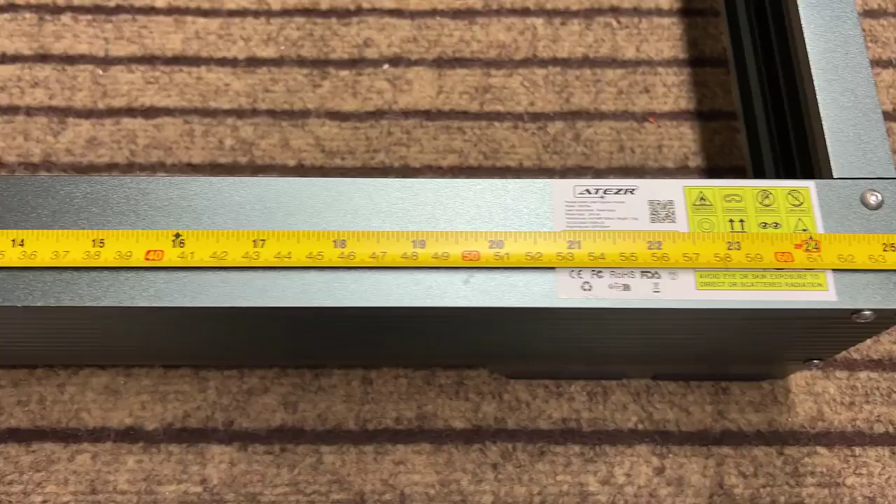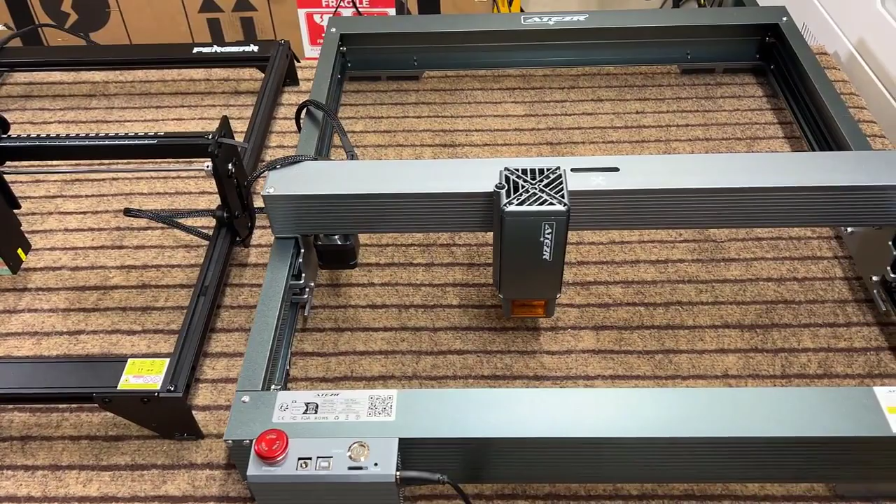Let's take a look at the features of this machine. One thing I noticed is that this machine is larger than other standard laser engravers, as its working area is 430 by 430 millimeters compared to the standard 400 by 400 millimeters. The frame is also more rigid than the standard open frame engraver with 20 by 20 extrusions, so this machine is similar to the Xtool D1 Pro in that sense. But instead of using steel wheels like the Xtool, its motion system uses rubber wheels that are commonly seen on budget 3D printers and engravers.

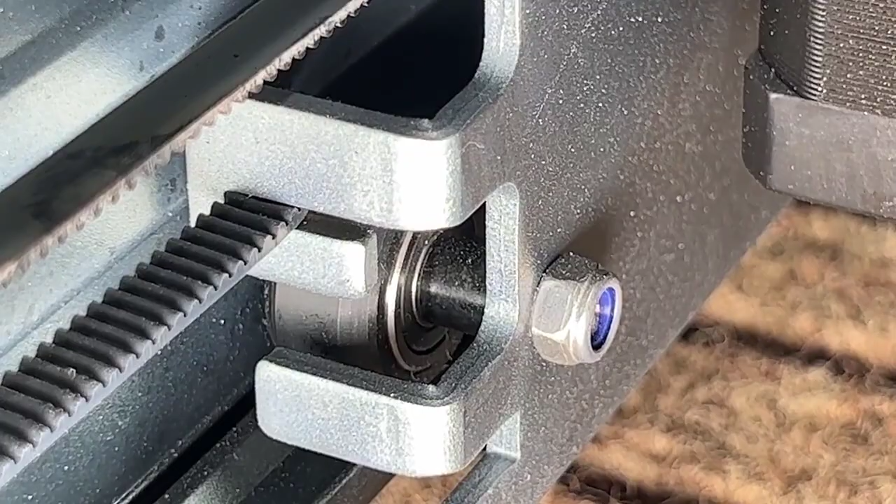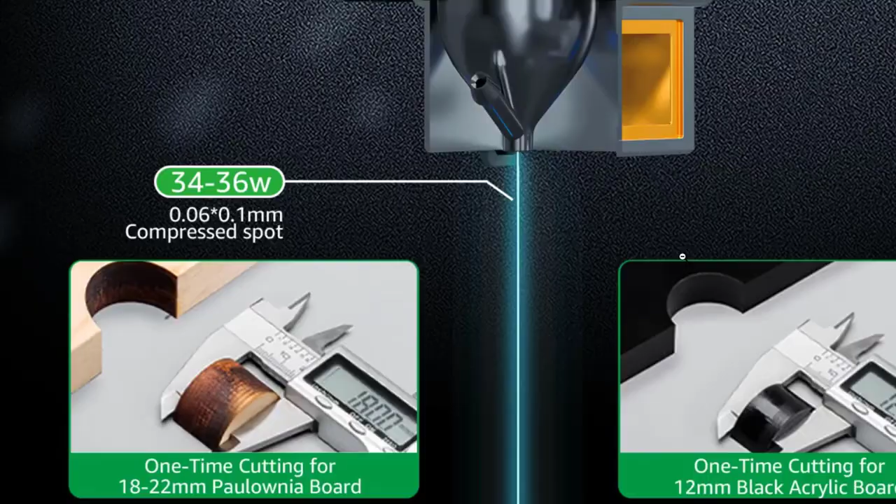The 35-watt module is composed of 6 6-watt modules, so it can achieve a total power of somewhere around 35 watts. With a higher power, I'd expect this machine could cut thicker materials and run at a higher speed. It claims it can cut 18mm solid wood in a single pass, and the top speed is 24,800 mm per minute, which is pretty fast.

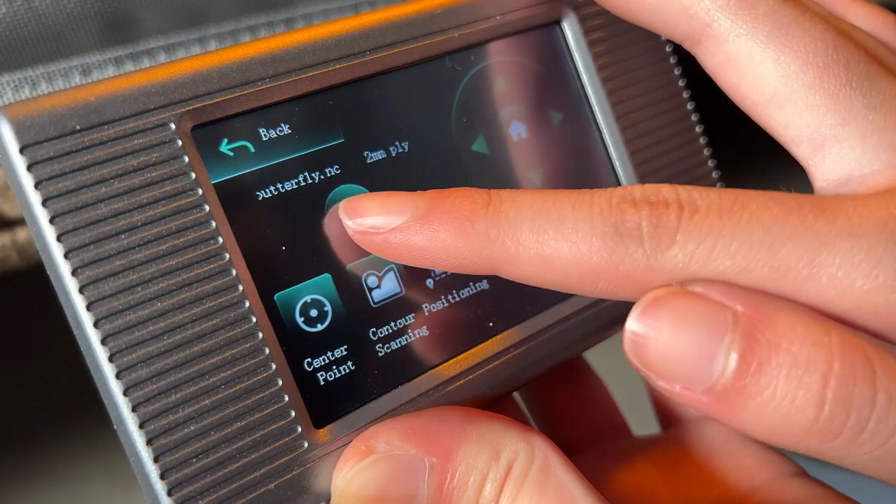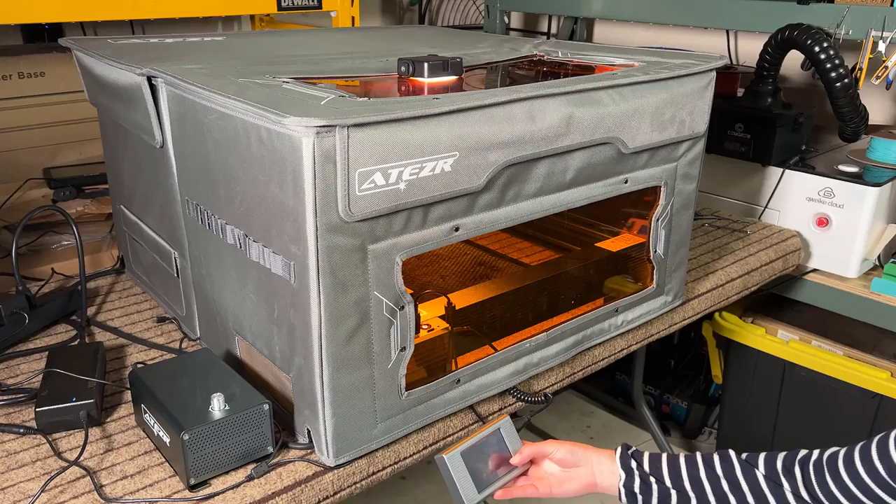The machine comes with a 3.5-inch touchscreen that lets you start jobs stored in the microSD card, and also has some basic controls like jogging the machine. It uses an HDMI cable to connect to the motherboard, which lets you move the screen outside the enclosure if you plan on using one.

It has a Wi-Fi antenna to connect to their mobile app, but it doesn't come with any kind of computer software, so you have to use the free LaserGRBL or pay $60 for Lightburn.

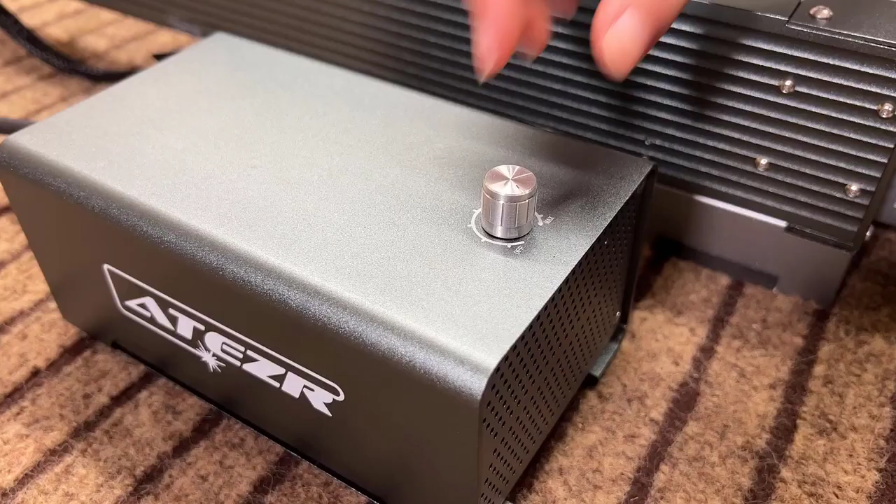The machine does come with an air assist pump with a knob to adjust the airflow, and it's powered by the same power supply as the machine itself using a splitter cable.

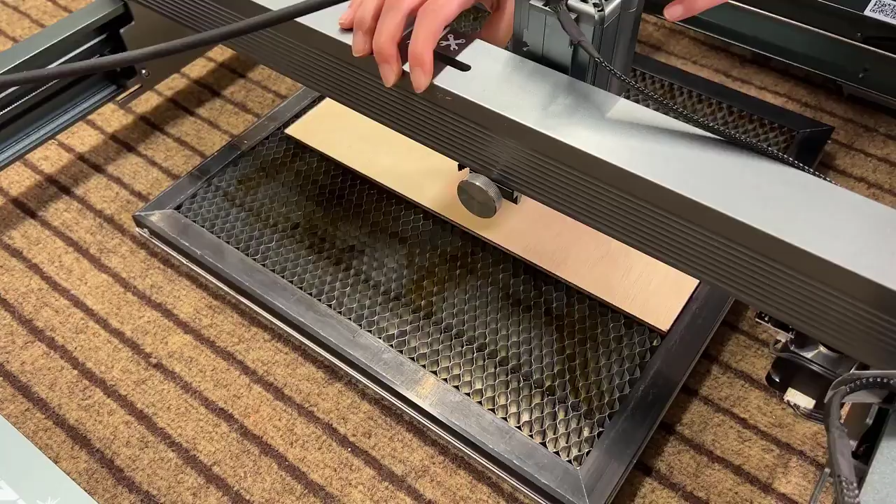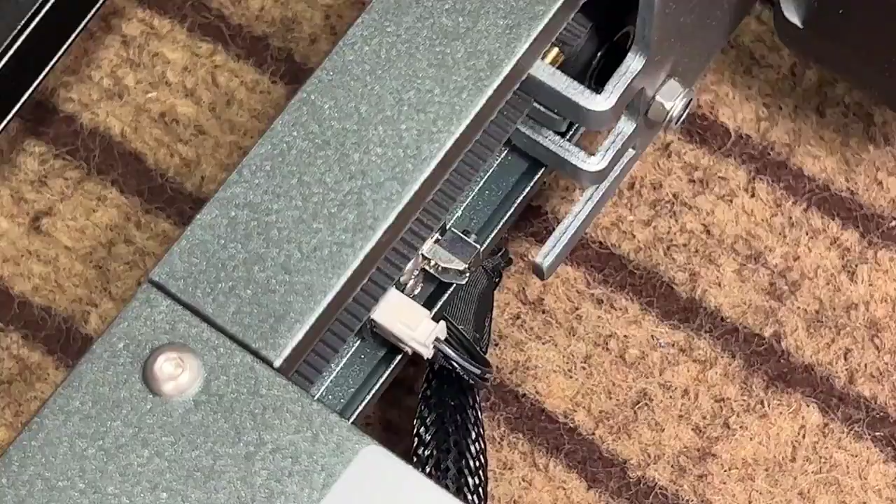The laser module uses a thumb screw at the back to adjust the Z height, and it has a lever to drop it down for you to measure the focal length on different materials. There are mechanical limit switches on both the X and Y axis, an emergency stop button, and a protective cover on the laser module. Overall, the specs and appearance of this machine are pretty nice.

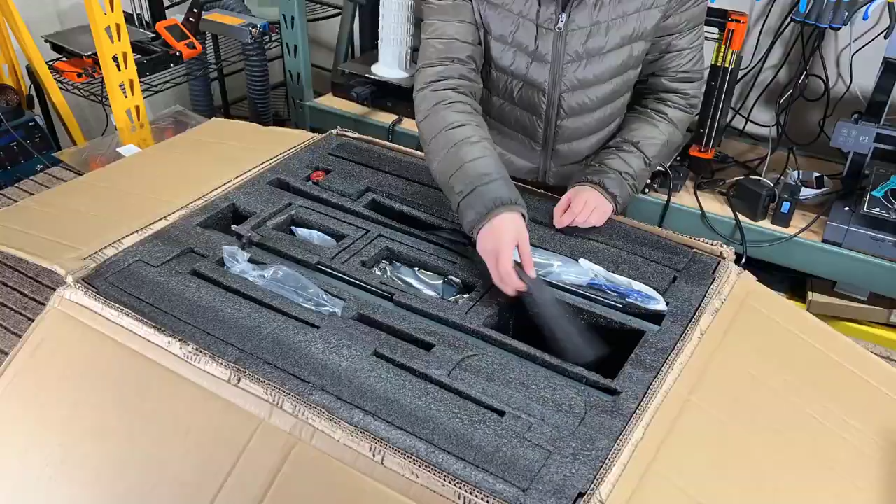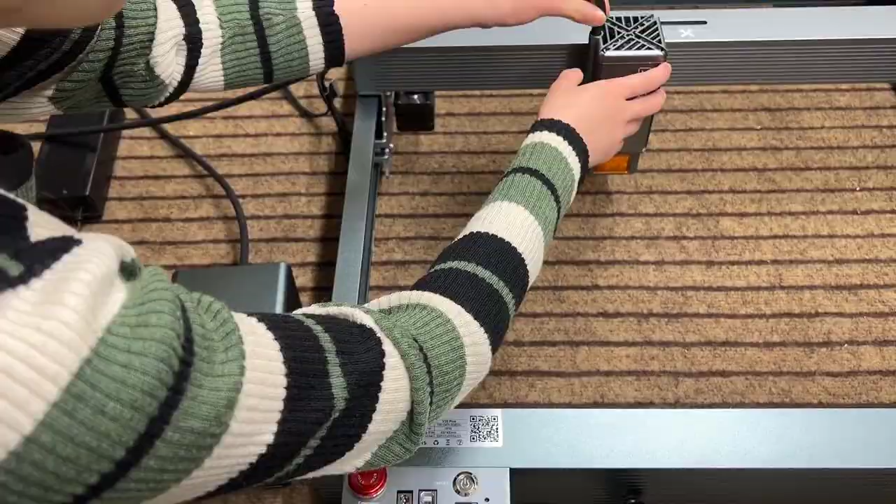Putting this machine together is super easy. You just need to put the 4 sides of the frame in the correct position, put the X-axis on top of the 2 Y-axes, connect the laser module, the touchscreen, the air assist pump, and tighten all of the screws. Other than the machine and air assist pump, we also have some tools, a user manual, and one power supply, which has a splitter cable to power the machine and the air pump at the same time.

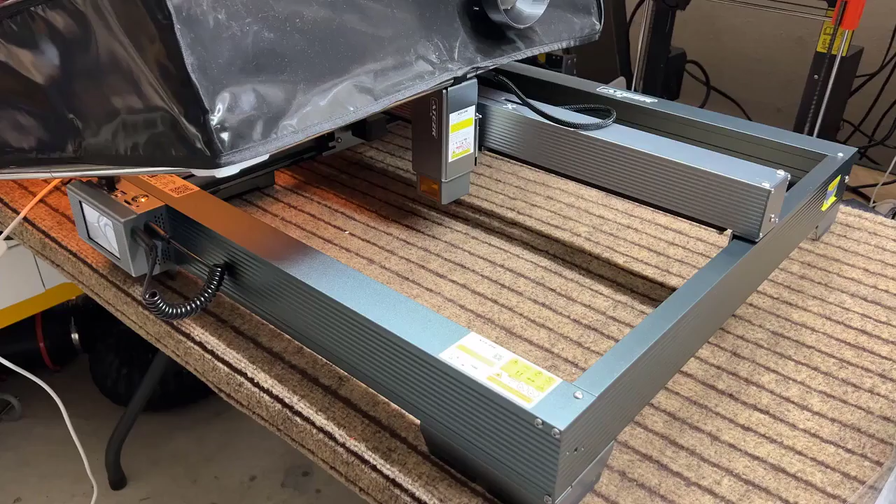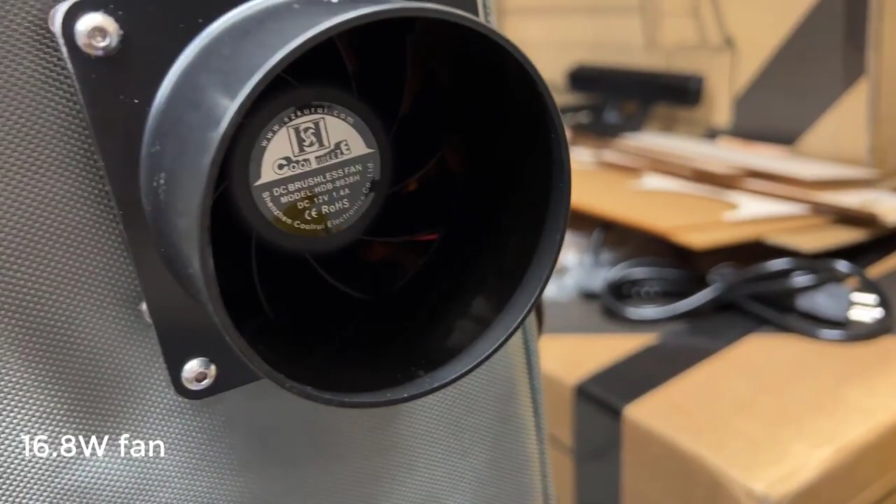As this machine has a larger 430 by 430 working area, the enclosures I usually use, like the Comgo laser tent and the Xtool enclosure, are both smaller than the machine. So if you're going to use an enclosure, you need to get one from Atezr. There's also a strong 16.8 watt exhaust fan at the rear right of the enclosure, and it comes with ducting, but I will just connect it to my existing one.

It has a touchscreen that works as a controller, and it connects to the motherboard using an HDMI cable, so I can still have access to it when using the enclosure.

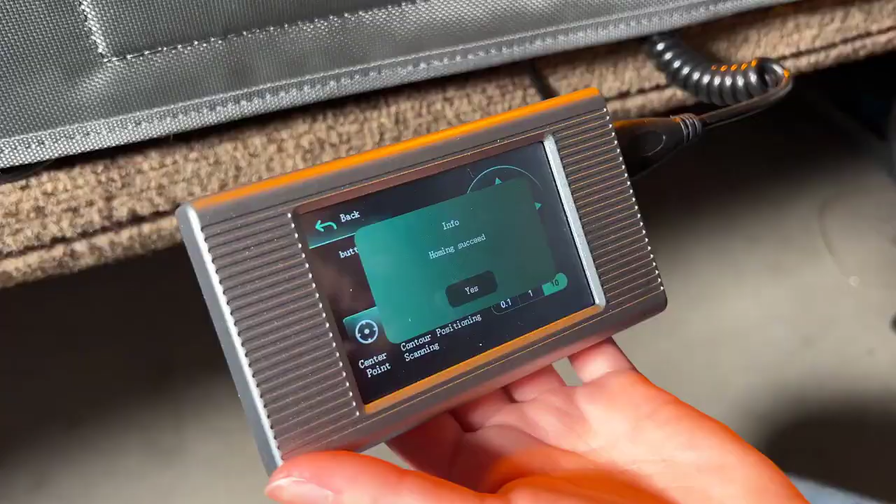I will home the machine to make sure the X and Y axes are working normally. I will start with a sample job and jog the machine to the starting position using the touchscreen. Draw the preview frame, and it seems this sample job is pretty small. Let's start the job.

Everything appears to be working fine, and we are ready to do more tests. I will now set this machine up in Lightburn. As Atezr comes with a Lightburn profile, all you have to do is import the machine under the device menu.

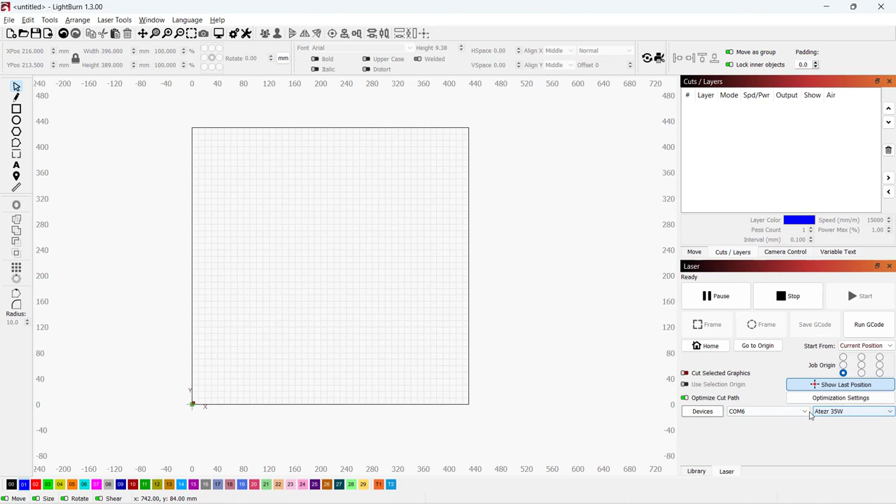I will start by running a material test, and as this machine claims its top speed is 24,800 millimeters per minute, I will run a test starting from 5,000 and going up to 25,000 millimeters per minute with 10% to 100% power.

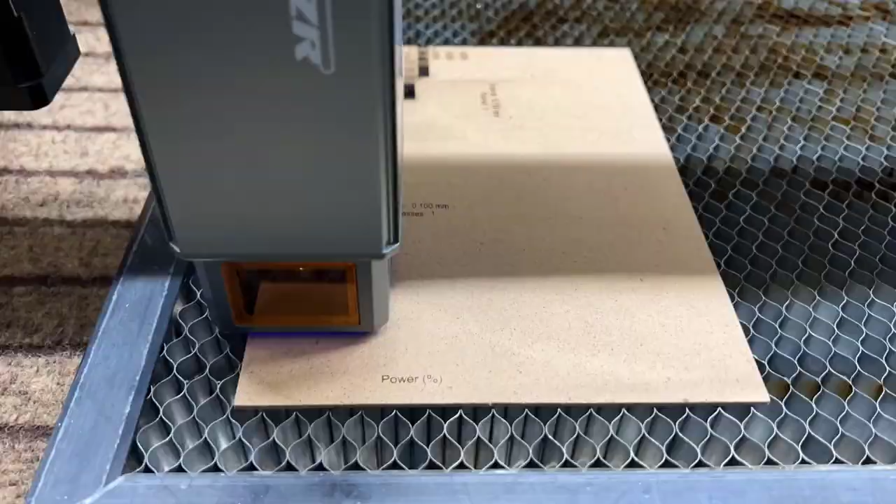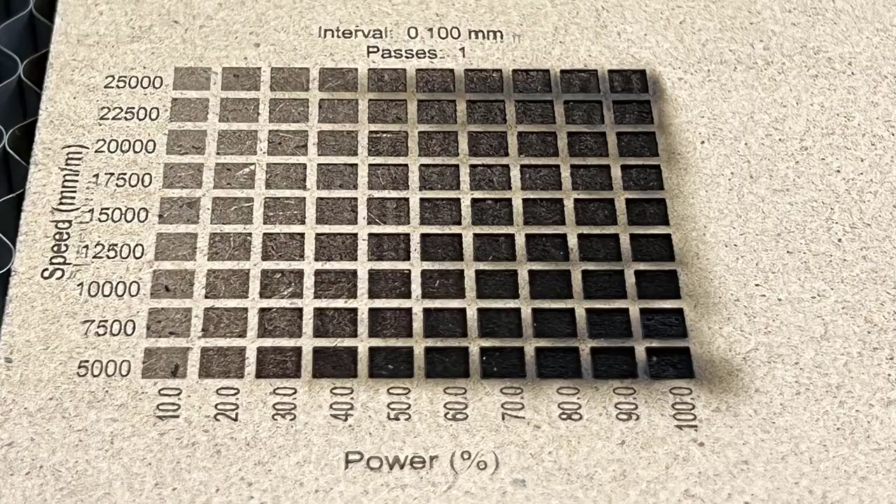The result is pretty nice, but surprisingly, I can't see much of a difference between 5,000 and 25,000 millimeters per minute. I would say the speed didn't go up, and everything was just engraved at the same or at similar speeds.

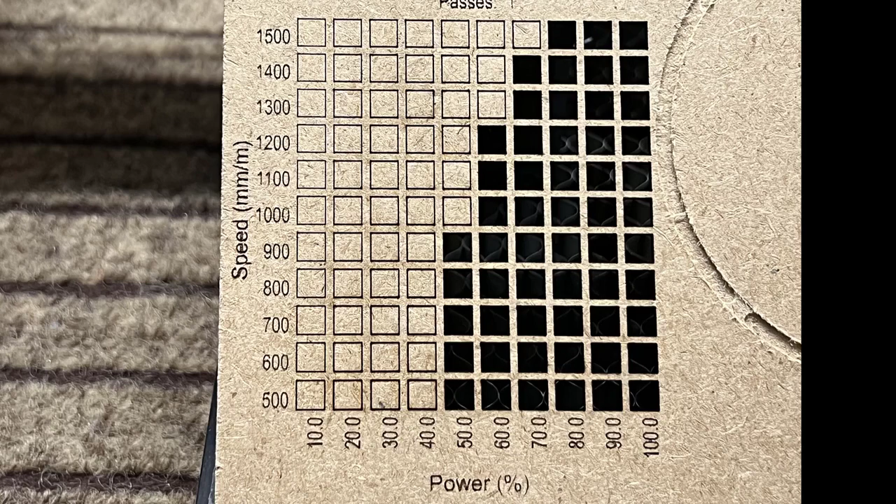Then I will try some cutting on the same 2mm MDF with the speed from 500 to 1500 millimeters per minute. For cutting, the difference is pretty obvious. Even though 2mm MDF is easy to cut, I didn't expect it to be able to cut at 1500 millimeters per minute and that we need to push it further. But 1500 cutting is enough, and with air assist, the edges are super clean.

Next, I will use a 5mm sheet of plywood from Home Depot and run another cutting test from 100 to 1000 millimeters per minute. When the job first started, I forgot to turn on the air assist pump, so you can see the edges of the first square are much darker.

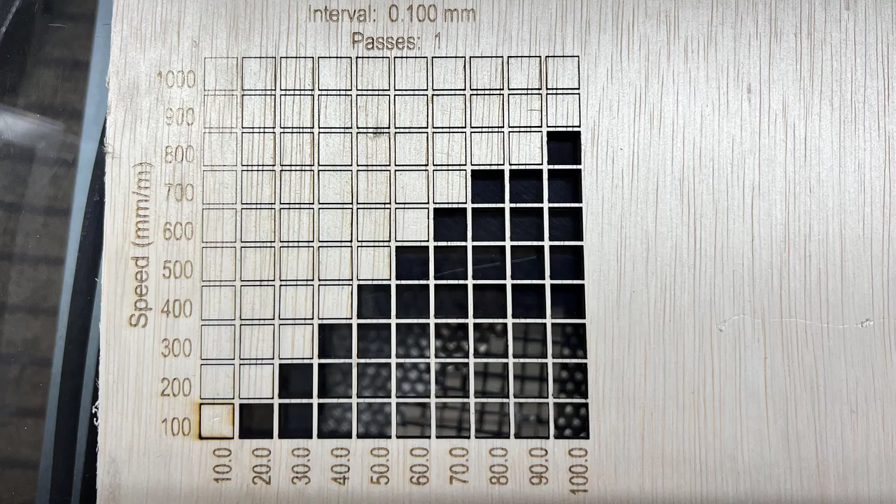This 35-watt module can cut through 5mm plywood at 800 millimeters per minute, while a regular 20-watt can only cut through at a 500 to 600 millimeters per minute speed. I will try cutting the entire piece out using 800 millimeters per minute and 100% power, and it cuts through completely without issues.

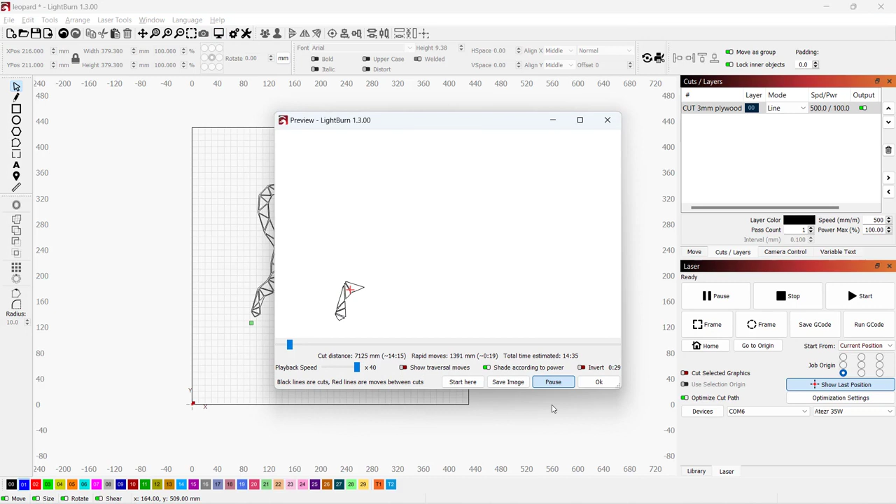After that, I will make a leopard by cutting out this vector leopard from the 5mm plywood. As there are a lot of small cuts, which may require a little more power than a simple straight line, I will use a 500 millimeters per minute speed and 100% power.

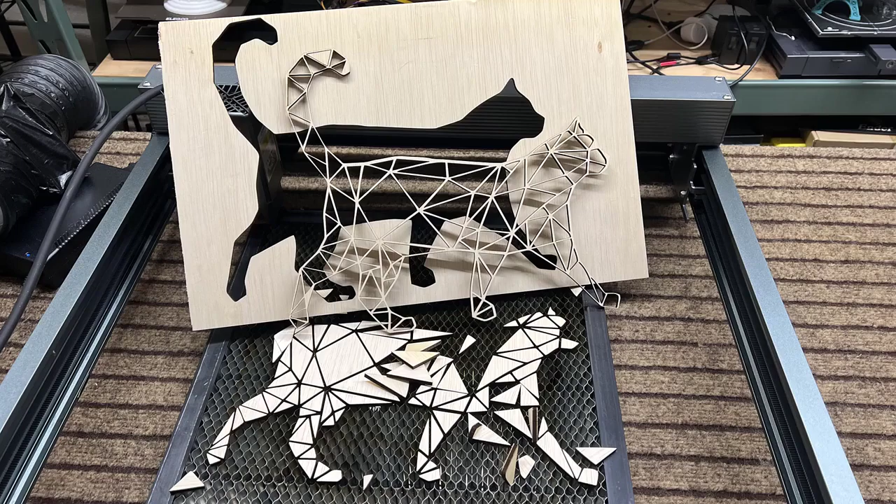The result is very clean, and every small detail was completely cut through. The edges on every last small piece are clean, showing that the air pump is really good for cutting.

Next, I will try some photo engraving. I will use the suggested feed rate and power on the user manual, which is 6000 millimeters per minute and 20% power. The estimated time of this job is 49.5 minutes.

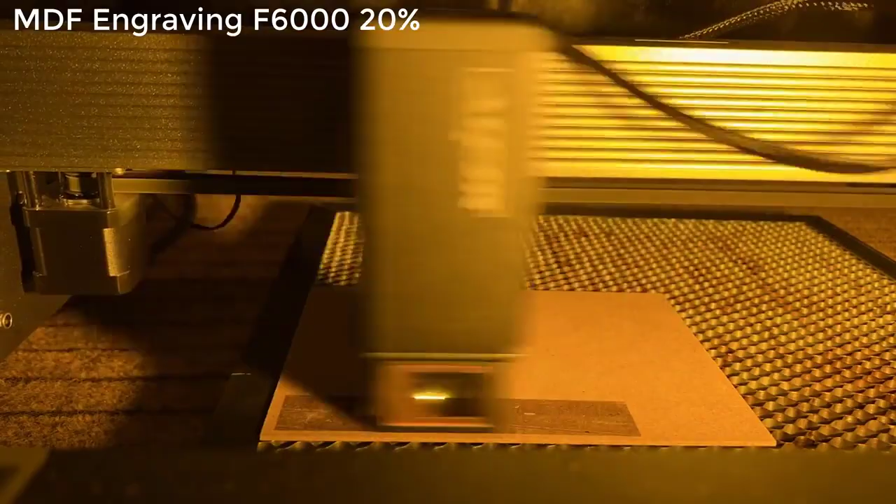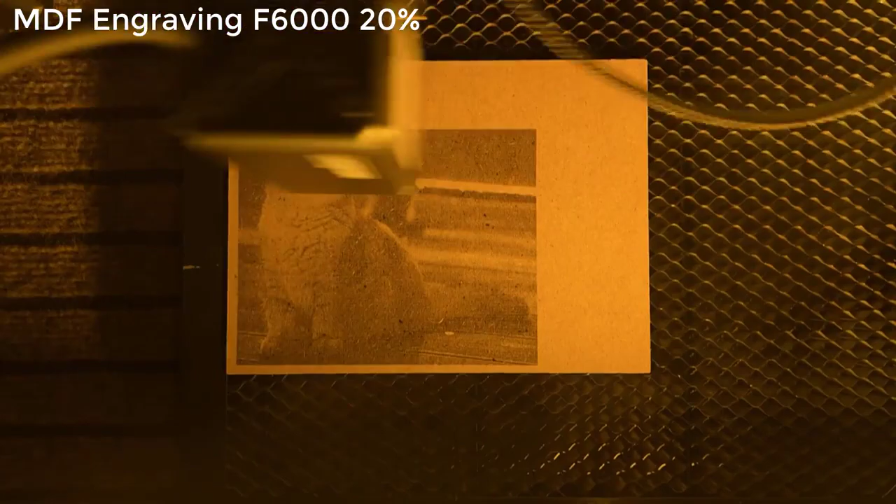The result is pretty good, but as the surface of MDF is not very consistent, you may see some black dots were burned too much, while other areas were completely fine.

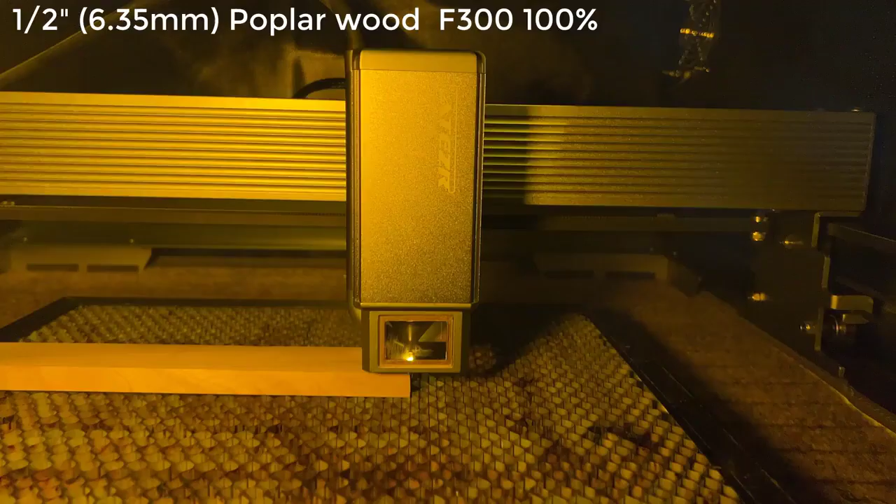As this 35-watt laser module should be able to cut much thicker materials, I will start doing some wood cutting, starting with this 1/2-inch solid poplar wood.

I will start with 300 millimeters per minute and 100% power, and it looks like it can cut through almost 2/3 of the wood at this speed, so I will slow it down to 200 millimeters per minute.

It can now cut pretty deep down to 3/4 of the wood, so let's try 150 millimeters per minute. It's almost there, so I'll slow it down a little bit more to 120 millimeters per minute.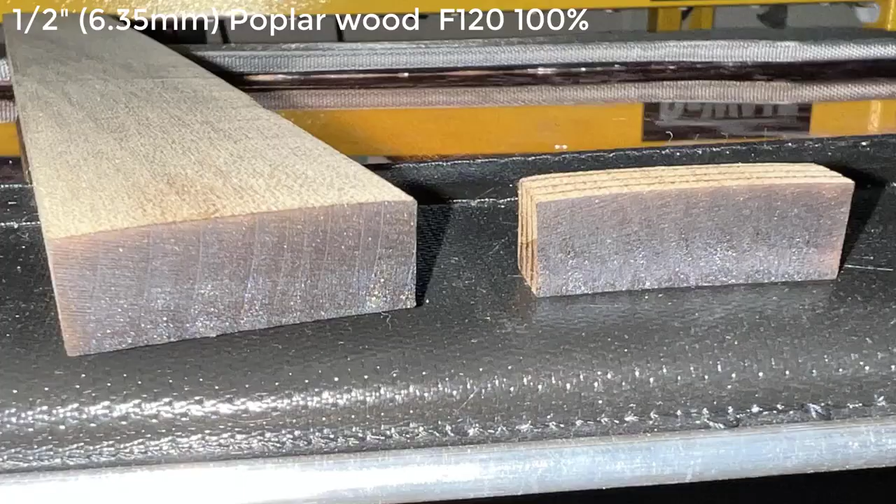The final cut at this speed was able to cut through completely. The rest of the cuts were done at 150, 200, and 300 millimeters per minute.

Then I would try some 19mm pine wood, starting at a 60 millimeter per minute speed. It cut through completely except for a tiny bit of wood still connected at the corner.

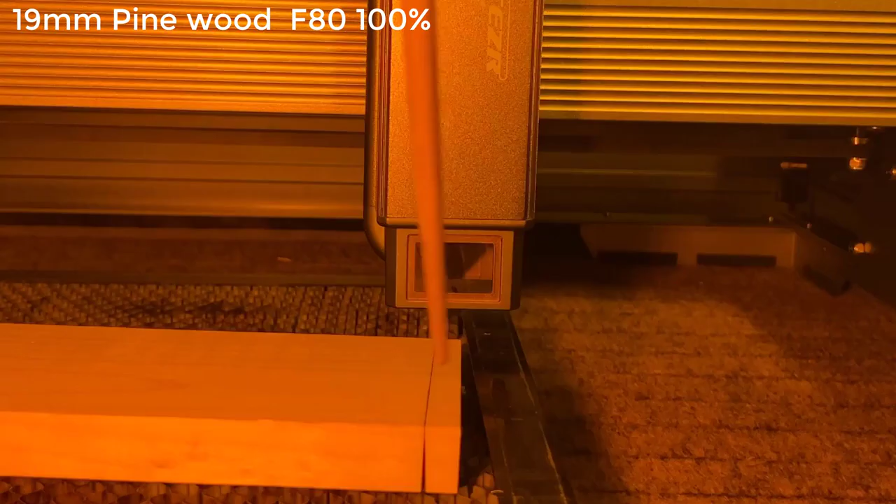I then sped it up to 80 millimeters per minute, and it didn't cut through, so we had to snap it apart. I would say that this machine can cut through 19mm wood in one pass at 60 millimeters per minute or slower. Then I will try some different materials.

Let's engrave some patterns on this round slate. I will just set the job to be larger than the actual slate, so the engraving pattern can cover the whole thing from edge to edge.

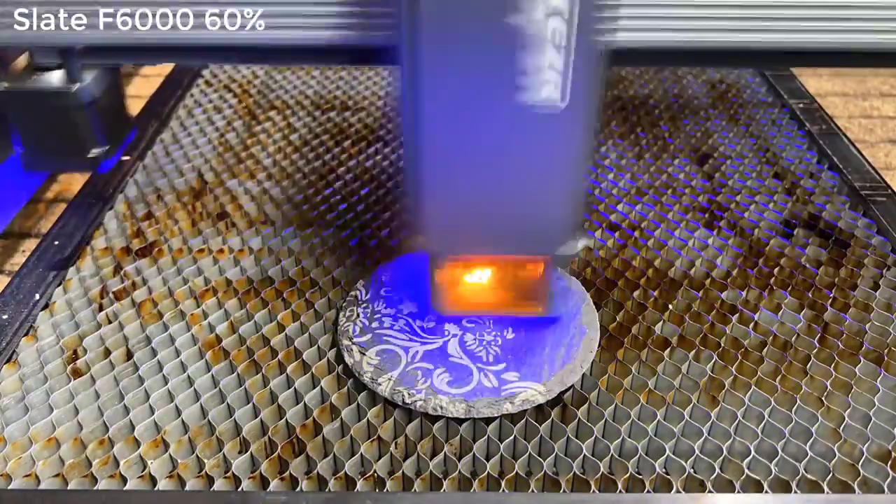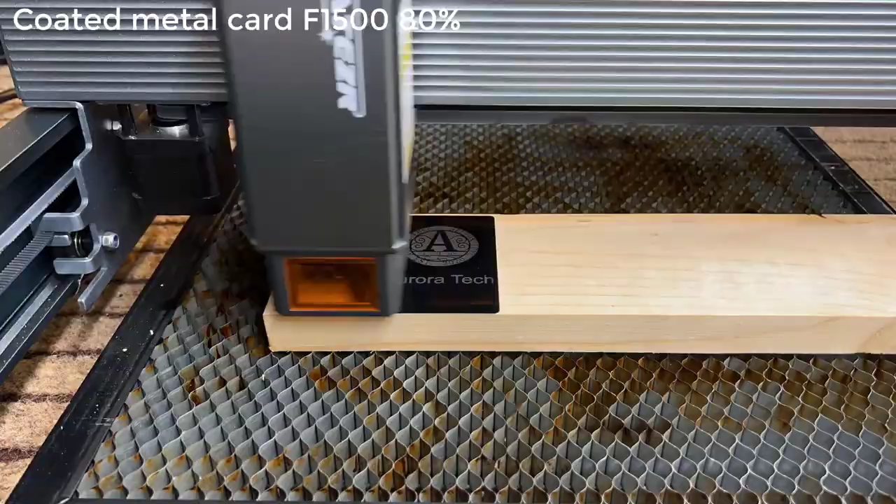The result is awesome. After that, I would try some metal cards. It actually burned off the coating on the surface and left only the original color of the metal card.

As diode laser engravers can't engrave on clear glass, I would try to engrave the same logo on this old 3D printer glass bed. My first attempt at 1000 millimeters per minute in speed and 50% power is too light,

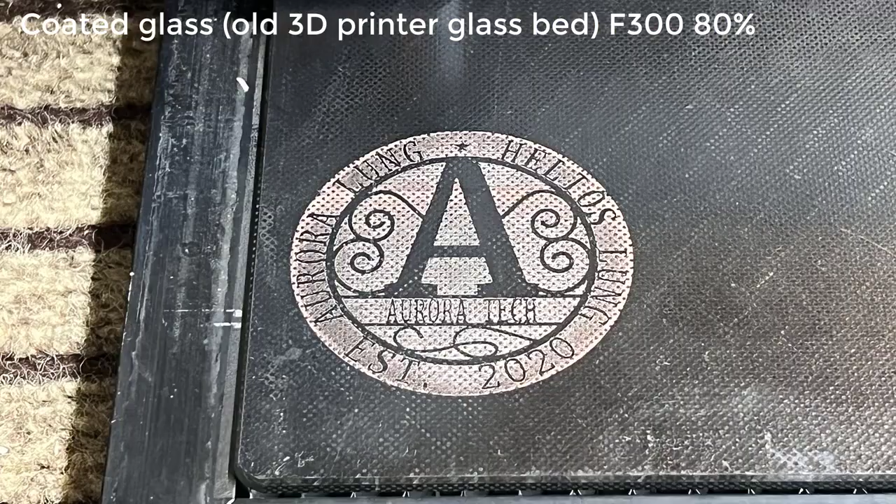so I ran another pass at a 300 millimeters per minute speed and at 80% power. This time, the marks on the glass bed are much better, and this is how it looks from the back.

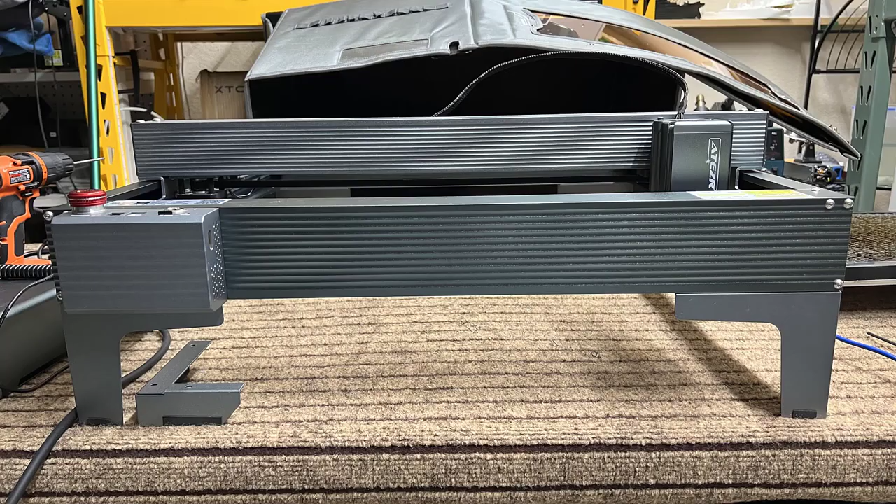Finally, I will try to make something with a rotary roller. The roller kit comes with 4 longer legs for you to replace the stock legs, so the machine can be raised up to fit with the rollers and taller objects.

The kit actually includes 2 rollers. The first one is a regular one for traditional bottles and mugs.

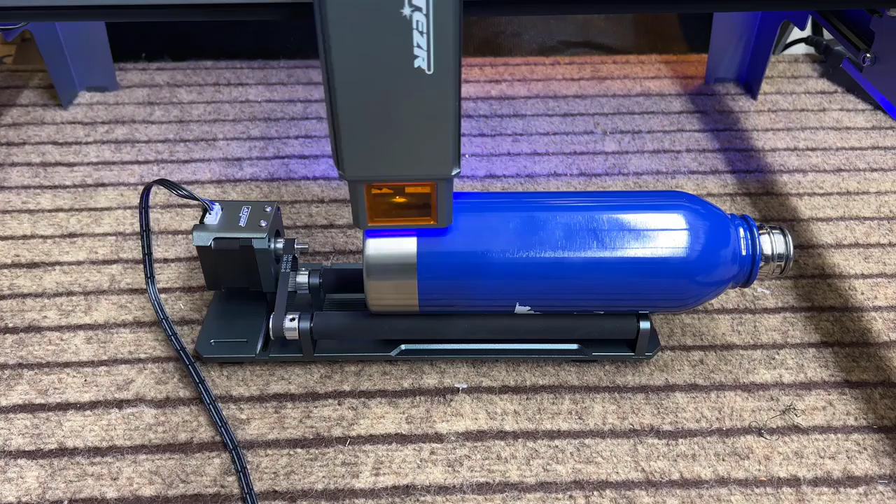I will try to engrave some text at the bottom of the steel water bottle, and I will use a 1500 millimeters per minute speed with 80% power on the stainless steel surface. The text can be clearly seen and there are no issues.

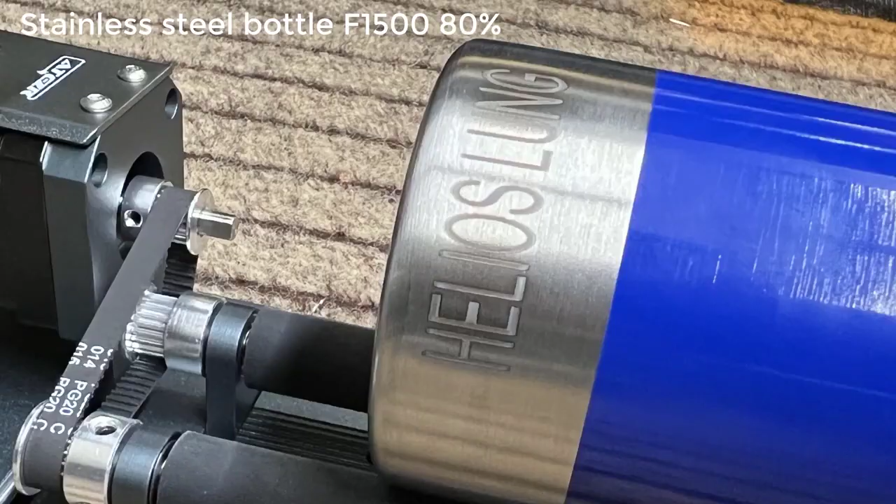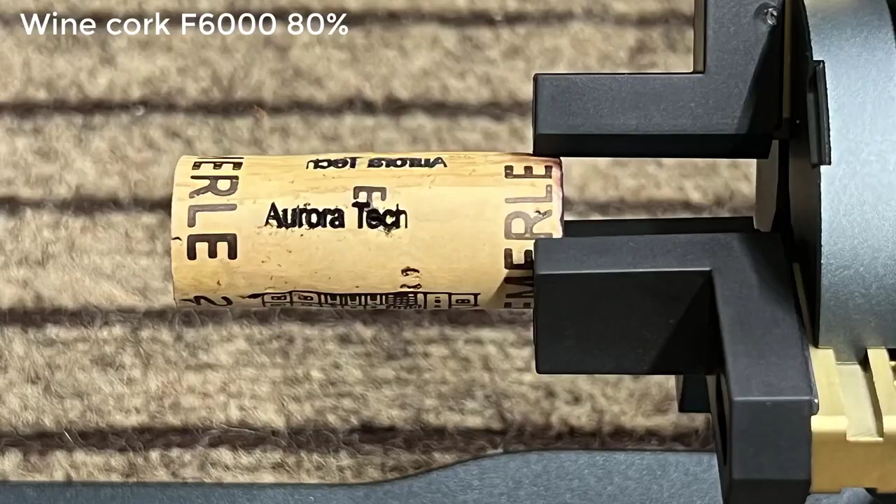The second roller with the kit is like a claw, and it allows you to grip tiny objects as small as 1 millimeter. I will take one of the wine corks from my dad and try to engrave some text on it. I will also try to engrave on a golf ball, but as the surface of the ball is

just like plastic, it got burned and you can't really tell what was engraved on the surface. At least it shows the roller is capable of grabbing something like this.

Okay, let's talk about the pros and cons of this machine, starting with the pros.

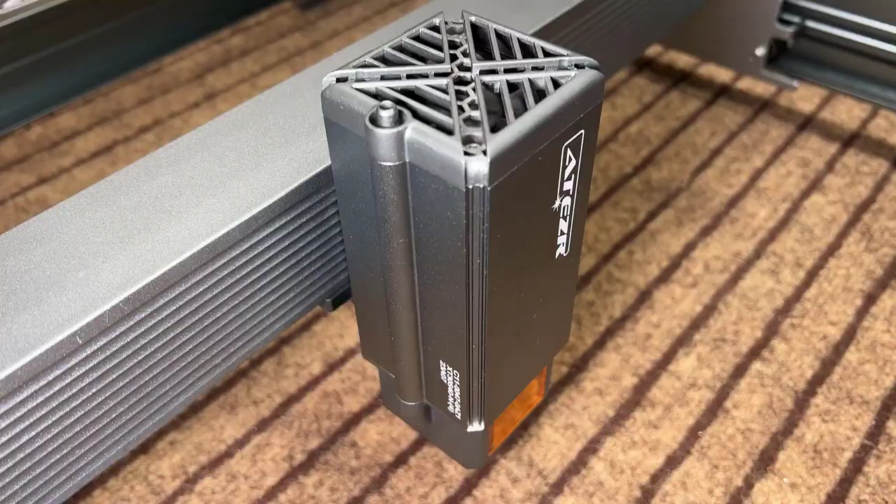1. The build quality of this machine is pretty good. It's better than the average desktop engraver that uses 4 aluminum extrusions to form the frame. The build quality is not far from Xtool.

Generally, putting a laser engraver together is pretty straightforward, and the only part that takes up more time is installing the belt and adjusting the belt tension. But for this machine, the belts on the X and Y axis are pre-installed, so putting it together is even easier.

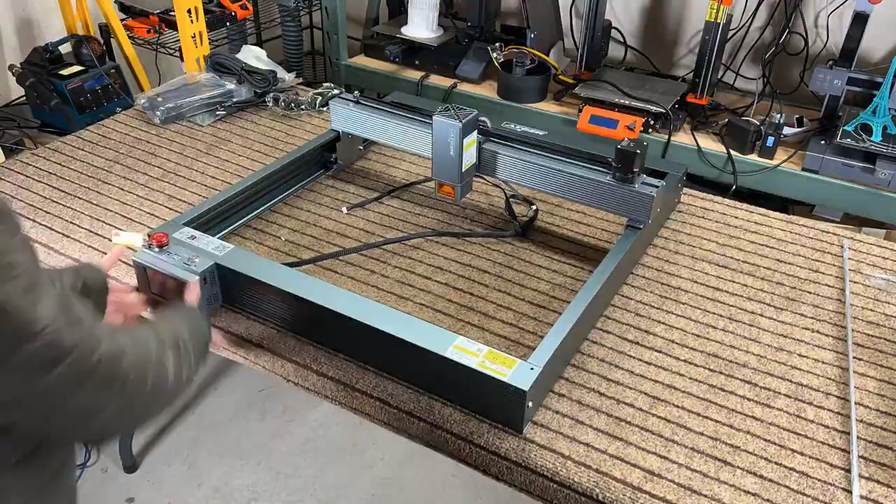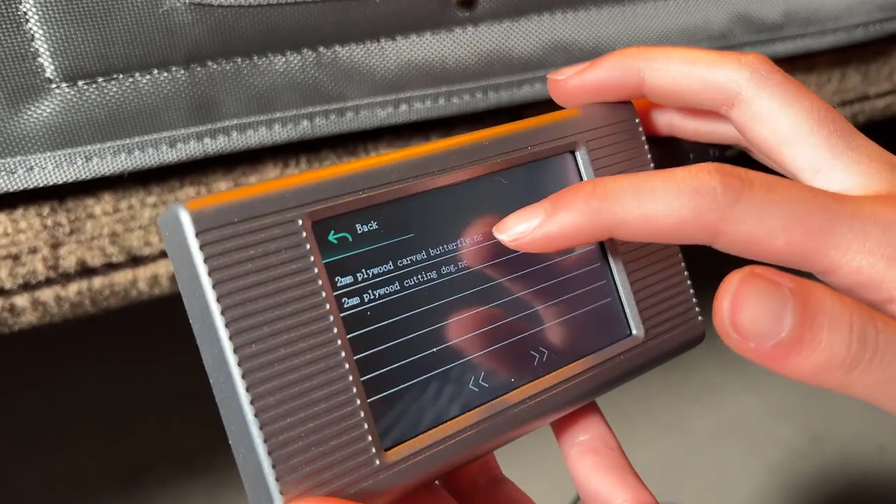The machine has a touchscreen, which is handy when you use it at a shop or if you have G-code files that you need to run regularly, as you can save them all on the microSD card and use the touchscreen to jog to the starting position and start the job. This can completely get rid of the need to connect to the computer.

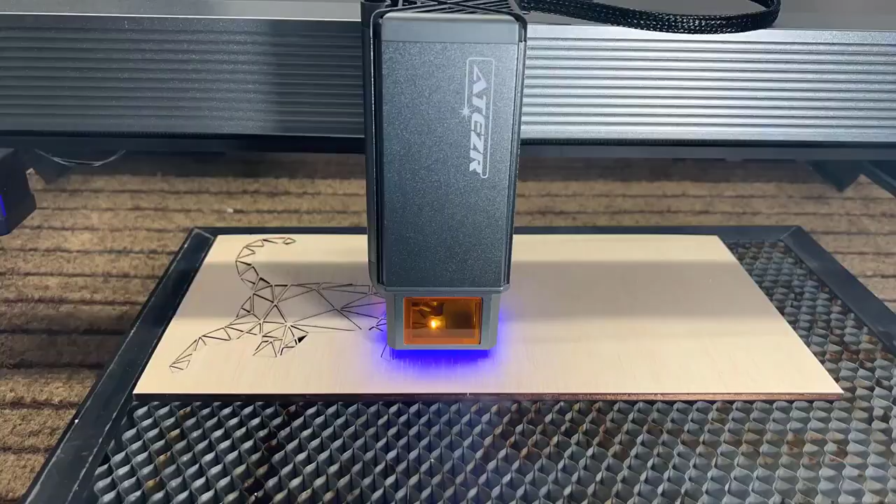The built-in air assist pump is quite nice, and unlike other add-on air assist pumps, you won't see an adapter sticking out from the laser module. The pump itself is also pretty powerful. With a 30 liter per minute airflow rate, the cutting results are cleaner. Additionally, it uses the same 24-volt power supply as the machine, so you don't need another power cable or supply, but I will talk more about this later in the cons section.

It comes with a mobile app for you to connect to wirelessly, and though the app itself is not very impressive, it still allows you to start a job with some basic controls. It's not a total game changer, but having this extra option is handy if you want to do something really simple. The accessories, including the laser enclosure and the rotary roller, are well made, so Atezr's build quality is higher than other average brands.

Now for the cons. First, the actual maximum speed of this machine is around 6,000 to 7,000 millimeters per minute, which may be limited by the firmware. If you have experience using a diode laser at 20,000 or faster, you might know that the results are not very usable as the engraving is too light. But since this machine claims to be able to work at 24,800 millimeters per minute, I still wanted to see if it could actually engrave at that speed.

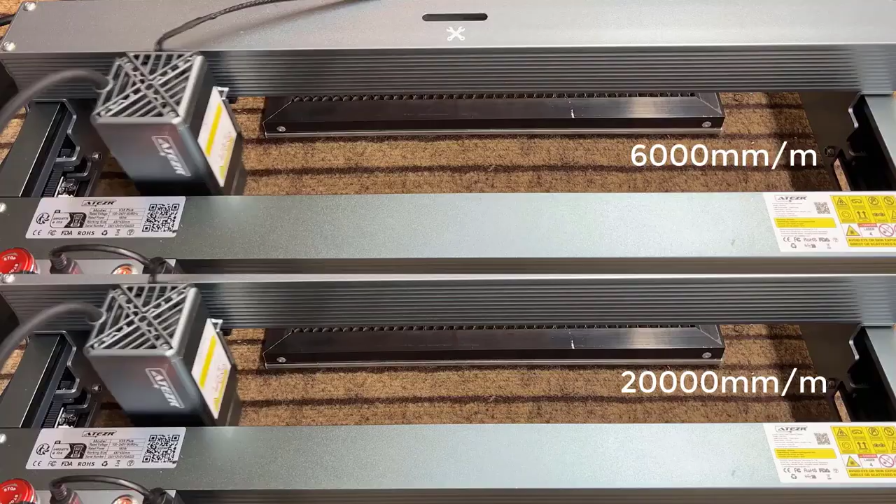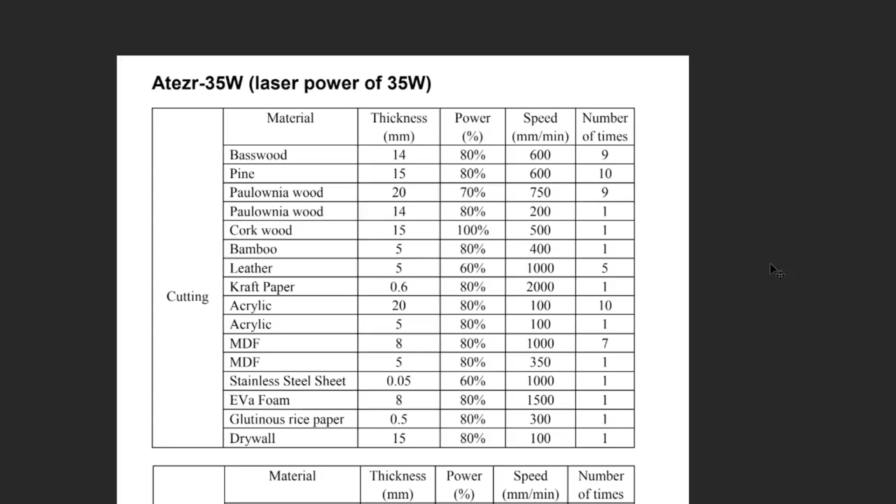In some cases, such as making a poster or signboard, where you just use the machine to mark some drafts on the board and use the lines or dots as a guide for drawing, painting, or drilling, the lightness of the engraving is not a concern. However, I just couldn't get the machine to move at any speed higher than 6 to 7k millimeters per minute, as even if I set the speed to 20k, it still moves at the same speed as 6k. Additionally, the maximum recommended speed in the user manual is actually 7k millimeters per minute or slower, regardless of the material being engraved. I think Atezr should really look into this issue.

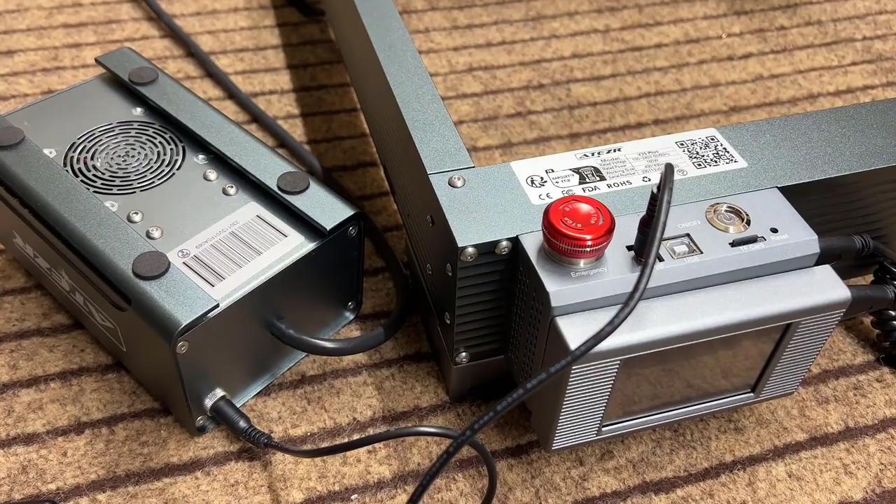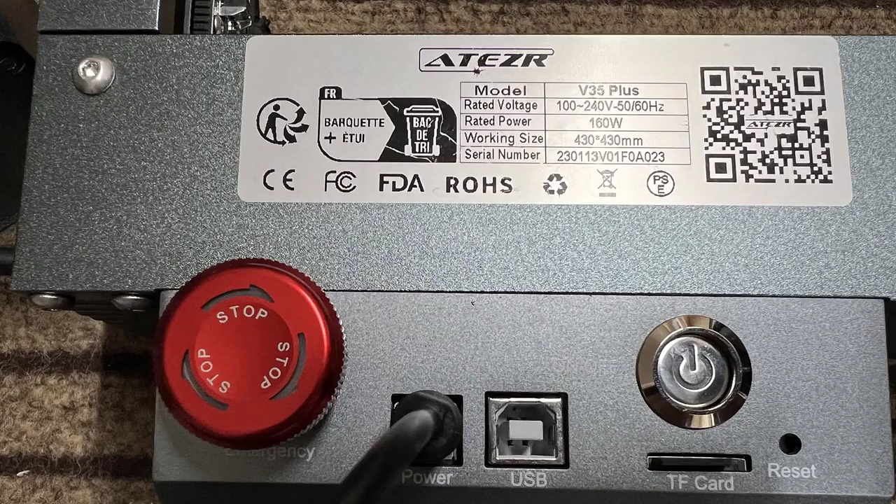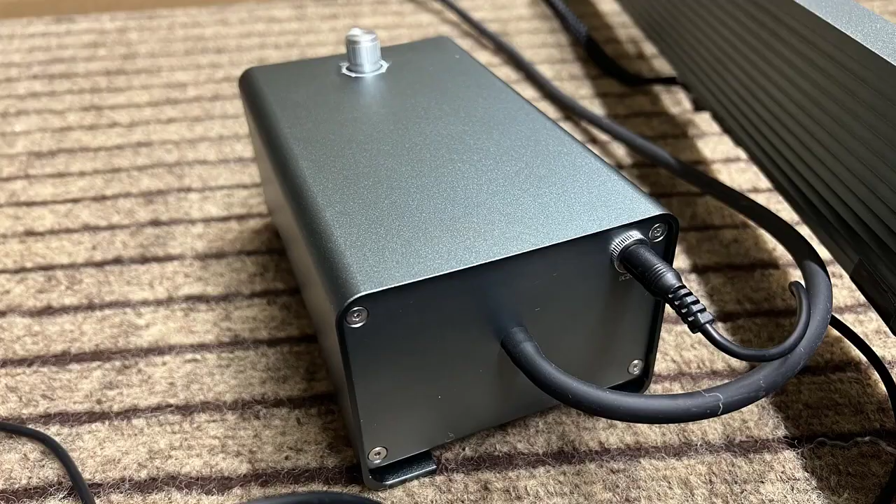Second, the power supply uses a splitter cable to power the machine and the air pump at the same time. The good thing is, you don't need another power supply to power the pump, but the power supply that came with the machine is a 24-volt 6-amp. While the maximum power is 144 watts, the machine itself is rated at 160 watts, so I'm not sure how much the performance is decreased if a 144 watt PSU is used to power this 160 watt machine and the additional air pump. But for the cutting power test, I was able to cut 19mm solid wood in one pass, which is in line with what they claimed on their website. However, I would be happier to see a more powerful power supply used.

In addition, if the air pump is powered by the motherboard, it can be controlled using G-code in Lightburn. This eliminates the need to manually turn the air assist on and off while working on jobs that involve both engraving and cutting operations, allowing for a more efficient workflow.

Third, the risers are inconvenient. If you need to install the risers to use the rotary roller, you need to unscrew 3 screws on each side, or a total of 12 screws to remove the stock legs, and retighten another 12 screws to install the riser legs. It would be more reasonable to use some screw-on extension legs instead.

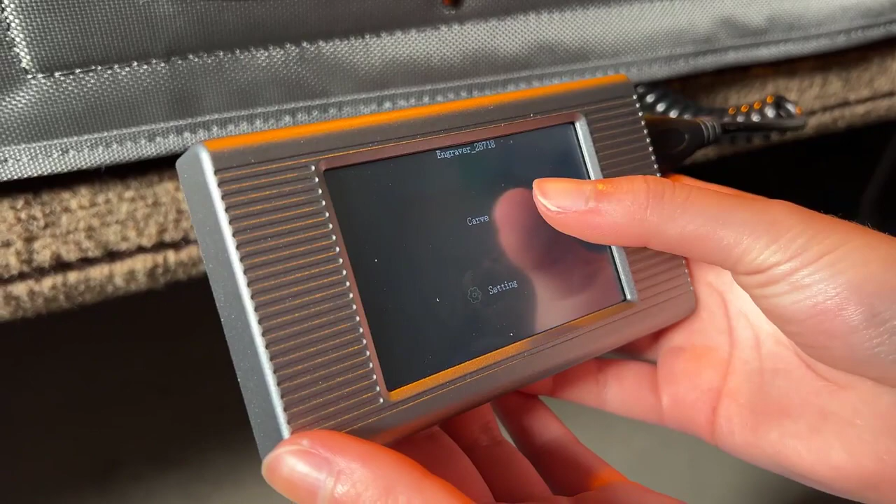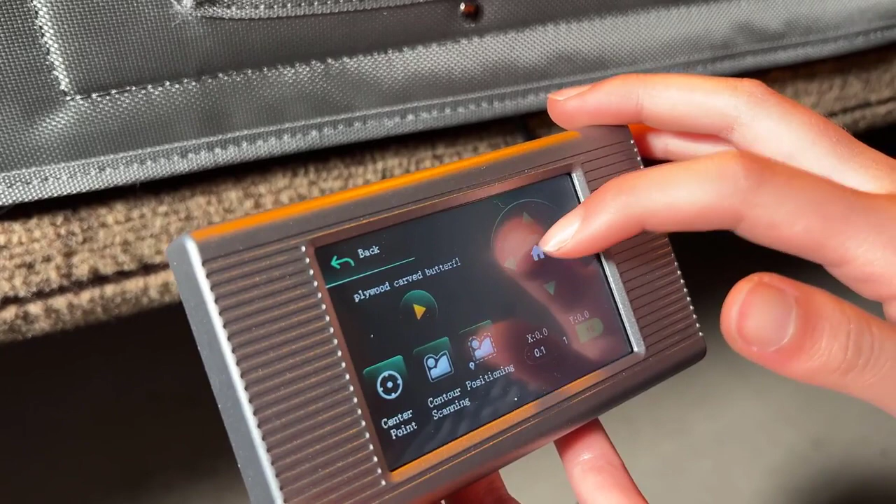Fourth, the touchscreen from MakerBase is the same as those on Atom Stack machines, which means they're not very sensitive, and the screen UI is completely useless if there are no G-code files present in the microSD card, as it requires you to select a file before showing the controller's screen. This workflow and UI design don't make sense, but as long as you keep at least one dummy G-code file in the microSD card, it still works fine.

In conclusion, this is a well-built machine that stands out from other standard 4-extrusion open-frame desktop laser engravers. I won't say it's as good as Xtool, but it's not far from it. For the same price as an Xtool 20W D1 Pro, this Atezr V35 Plus offers a more powerful 35W laser module, and it comes with Air Assist that doesn't require you to purchase separately. They both offer a wide range of accessories that allow you to upgrade the machine and easily expand the features.

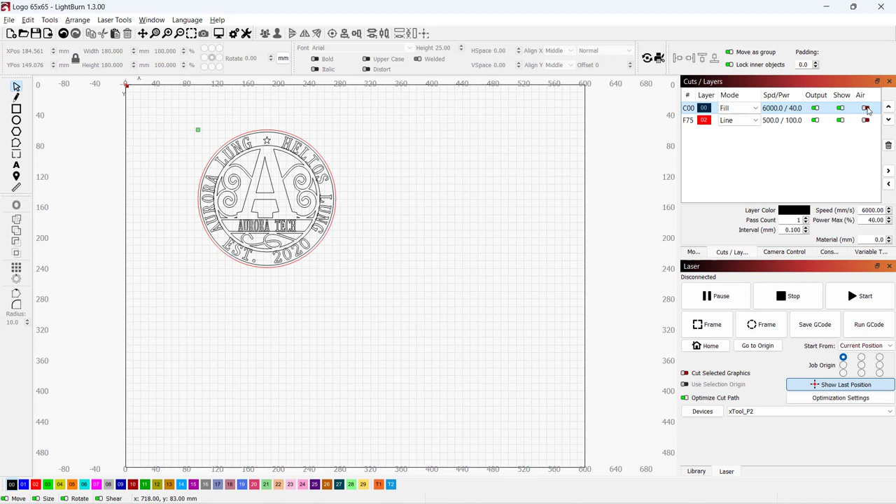However, you won't get the Xtool brand or the Xtool Creative Space software, which I use to do 95% of jobs without having to use Lightburn. But if you mainly use Lightburn, missing the Xtool software won't be a problem. Anyways, if you are interested in a higher quality than average and high power laser engraver, you can definitely take a look at this Atezr V35 Plus machine.